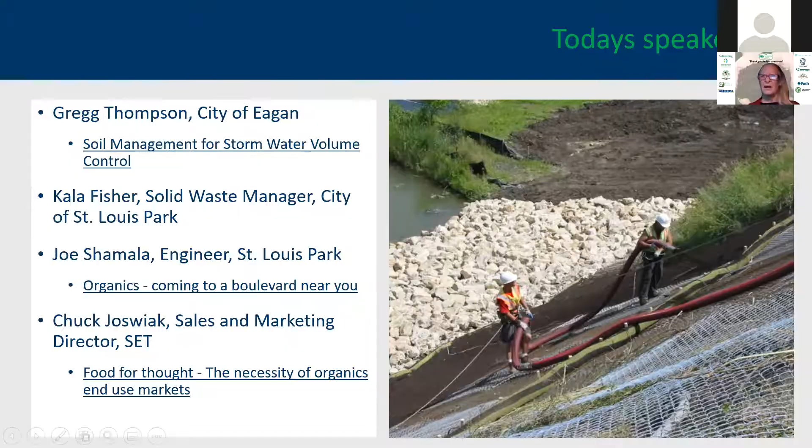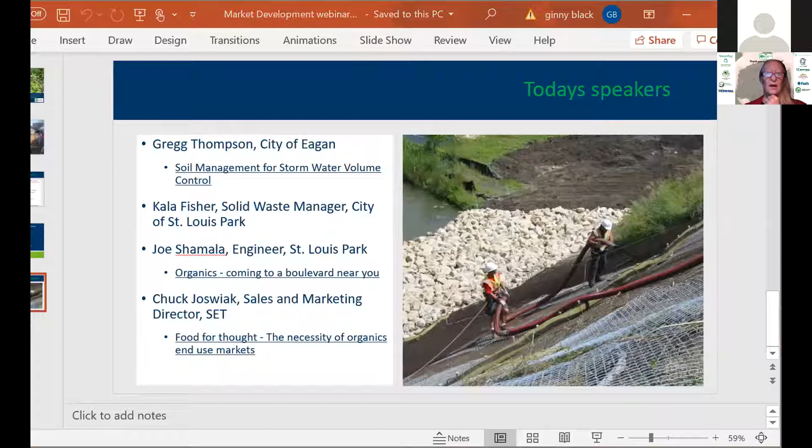So we're going to, let's see, stop sharing. And I'm going to bring up, let's see. I can, there we go. There's Greg.

The poll keeps getting in the way here. All righty, there we go. There we go.

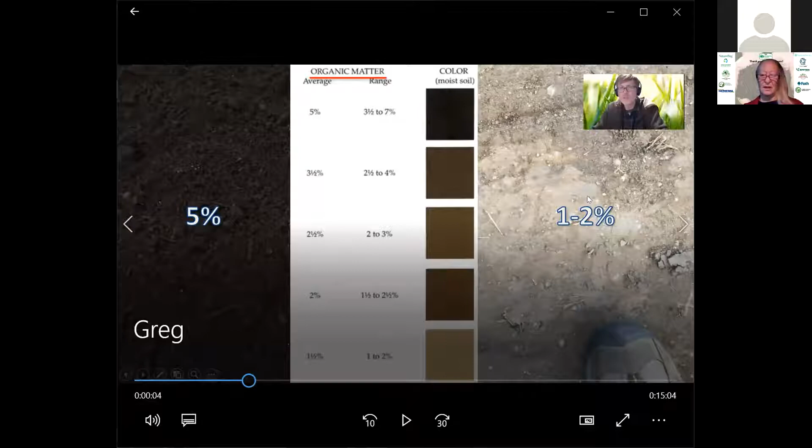Let's see here. Get out of the way. I have to, wait a second. Boy. Can you hear?

Hi, I'm going to talk about soil management for stormwater volume control. My name is Gregg Thompson. I work for the City of Eagan. I'm a watershed specialist at the city. Okay, so at the City of Eagan, I provide technical support to reduce stormwater runoff impacts on priority lakes through land projects. So if redevelopment projects, new development projects are triggering our post-construction stormwater rules or land disturbance rules, then I get involved on checking.

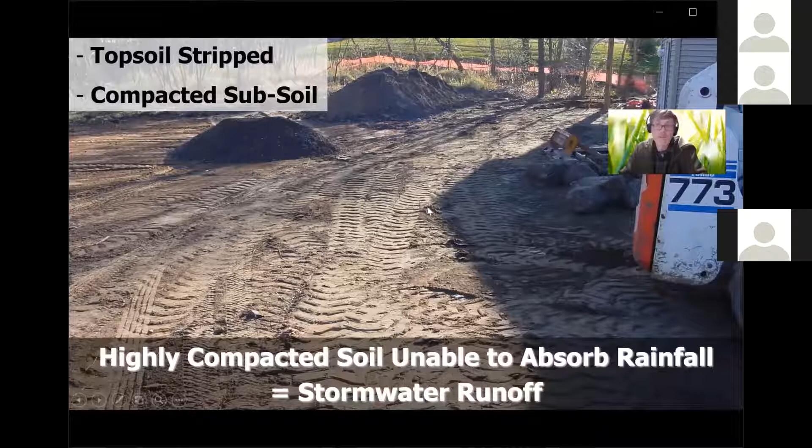So what often happens, these sites get revegetated on super compacted subsoils, mineral soils, sand, silts, clays that are just super compacted. Root growth can't push into that. It's too compacted. And then it gets vegetated, and then you get a rain event, and there's just a lot of runoff off of this. Water can't absorb into the ground anymore.

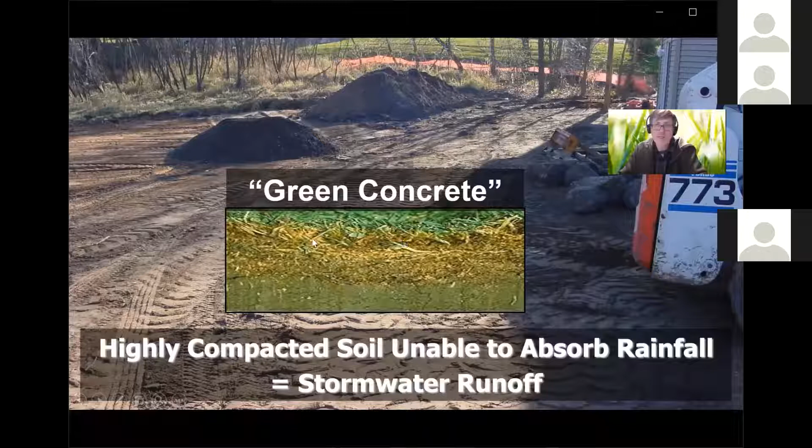So we call that green concrete when they drop sod on top of this, roll it out on super compacted subsoils. It absorbs a little bit of water into the sod itself and then saturates, like a quarter inch, and then everything else is running off in a rain event. So comparing natural soils to compacted soils.

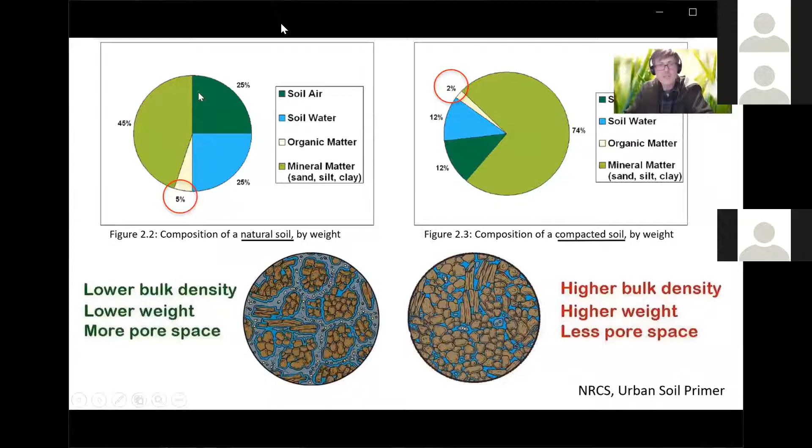It is typical on a natural soil for organic content to be 5 to 8%. You have less than 50% mineral soils, air pockets, moisture, water within there. So low bulk density, low weight, a lot of pore space within natural non-compacted soils, compared to compacted soils that just get scrunched down. Topsoil gets stripped off, so very low organic matter within that soil, high amounts of mineral soils, so sand, silts, clays. That results in higher bulk density, higher weights, less pore space.

On the left is a 5% organic matter soil; it would look like a black topsoil, compared to a 1 to 2% soil organic content, which we used to see more of on construction sites. This is what it looked like right before they rolled sod out on it or seeded it and put erosion control blanket or hydromulching over the top of it, but horrible growing conditions for plants.

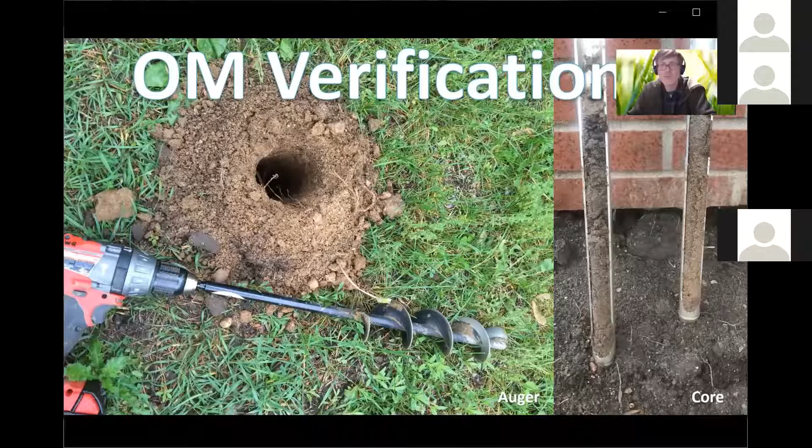Low organic matter, super compacted. Checking out soils, we use heavier duty soil augers or soil cores if you can physically get it into the soil. Sometimes we extract a 1-inch depth sample because the soils are just too hard. Send it to the lab, you get soil test results back. We're mainly looking at organic matter and pH.

Testing for soil compaction, we use a penetrometer as one device. That gives us readings in PSI. You're pushing it in at an equal pressure and then taking notes on where the gauge is on PSI. Below 200 is good growing conditions, so no restrictions on root growth. 200 to 300 PSI, fair growing conditions, it's sort of impaired root growth, and 300 PSI and above, poor growing conditions, really no chance of root growth into something that hard.

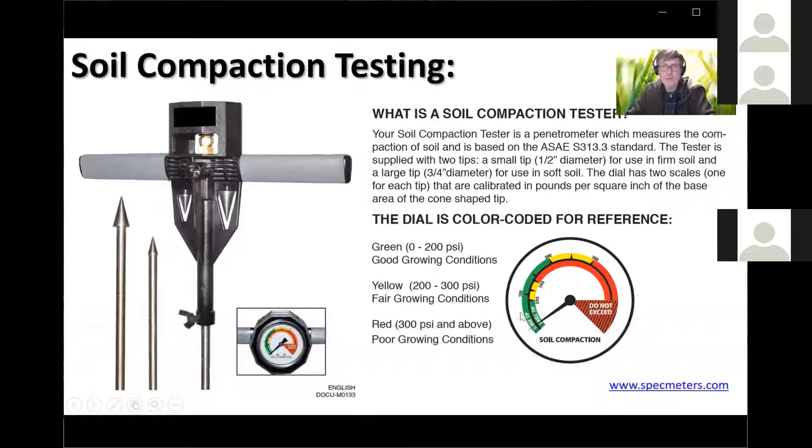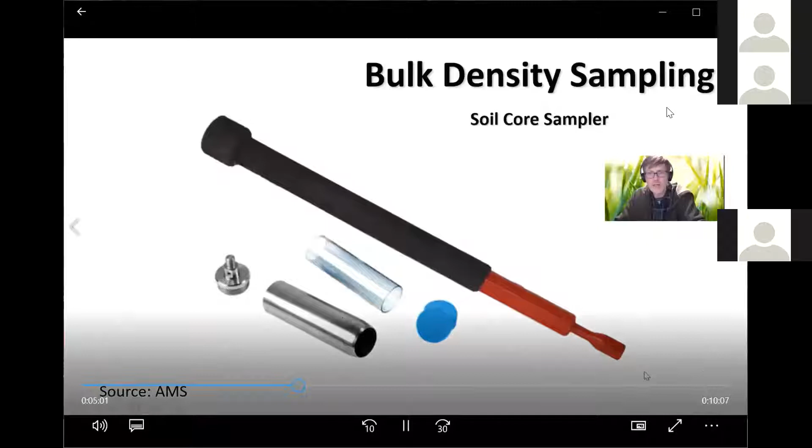Bulk density sampling, we use a soil core sampler. This is a slide hammer that goes on a bulk density sampler. We do this sometimes, but you collect the sample, a known volume, and then dry it out in a microwave and then weigh it to determine the bulk density.

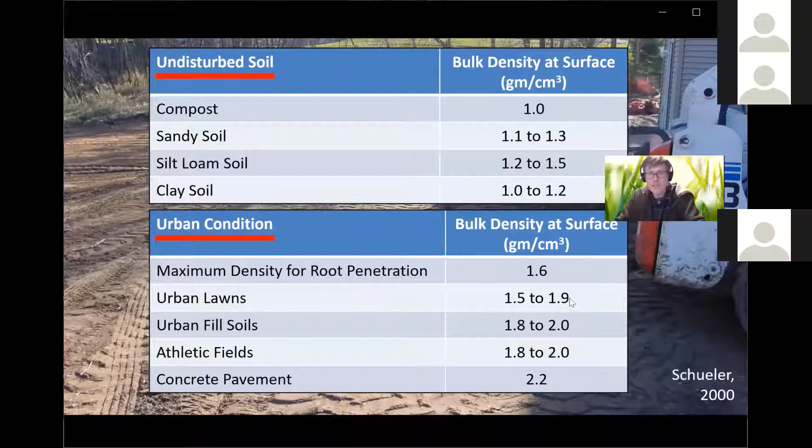For bulk density comparison, an undisturbed soil, so sandy soils, silt loam, clays, those are all right around 1 gram per cubic centimeter, compared to an urban condition. The maximum bulk density for root penetration is 1.6. Concrete pavement is 2.2. This was a table put together by Tom Schueler, who was at the Center for Watershed Protection at that time, doing a literature review of a lot of soil studies. What they're seeing is urban lawns, urban fill soils, athletic fields, all really close to 2, close to concrete on average.

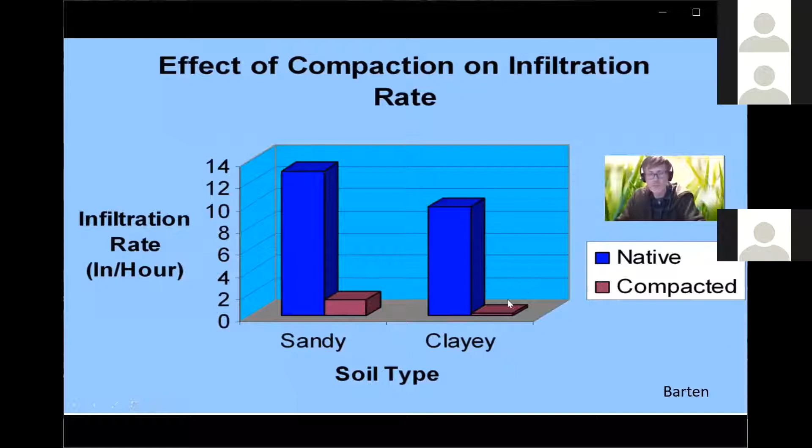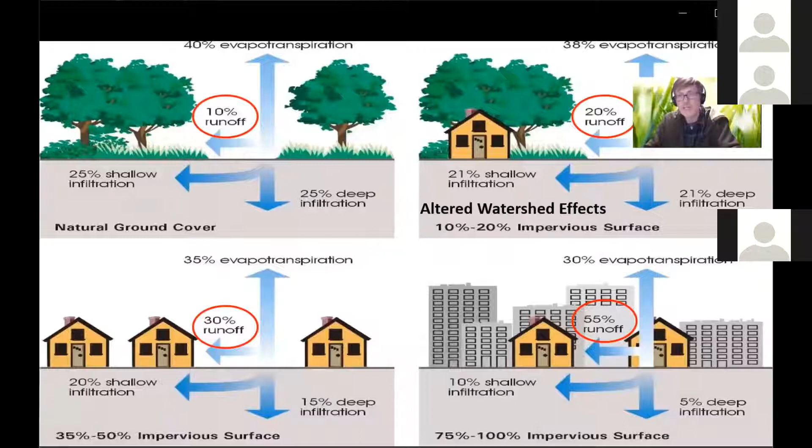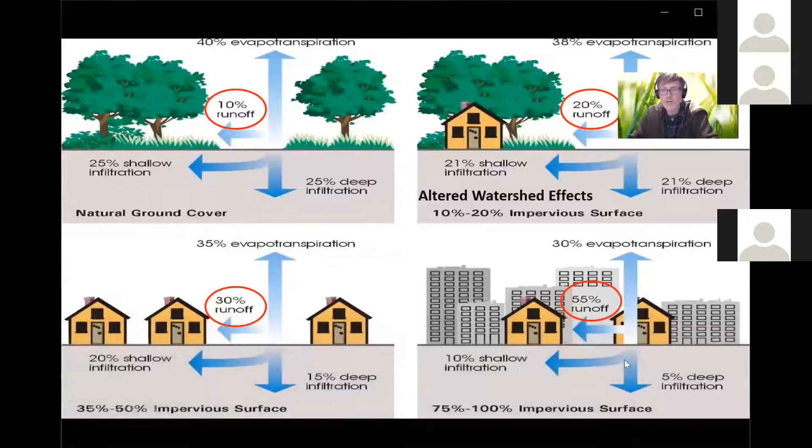So as we add impervious surfaces, rooftops, parking lots, driveways, streets, plus compacted subsoils underneath revegetated areas that have been graded and really highly compacted and disturbed, that's all effective impervious. The more impervious, the more runoff we have, the less water we have going into shallow groundwater and aquifers.

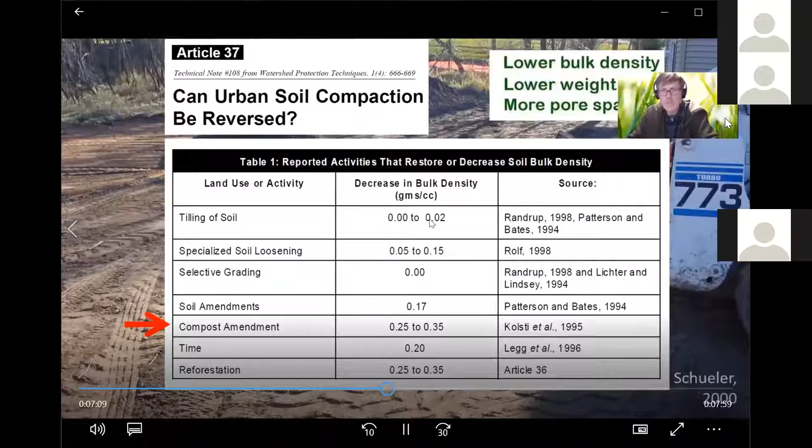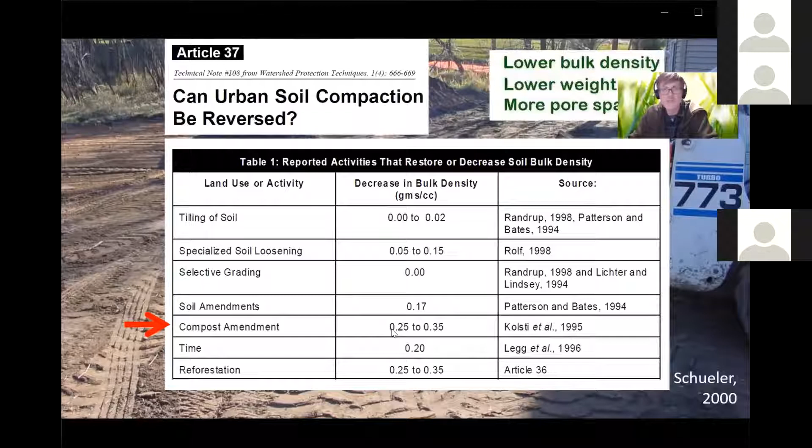Can urban soil compaction be reversed? This is also a literature review done by Tom Schueler of a lot of previous studies. Tilling of soil alone has really no chance of decreasing bulk density, because if you're not amending it with some organic matter to keep it open, it'll just seal back up. Compost amendment can be a significant way to reduce bulk density, because it creates this sponginess to the soil.

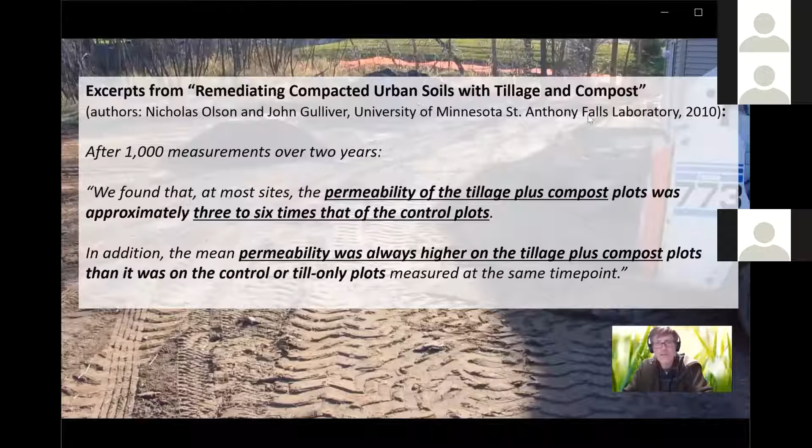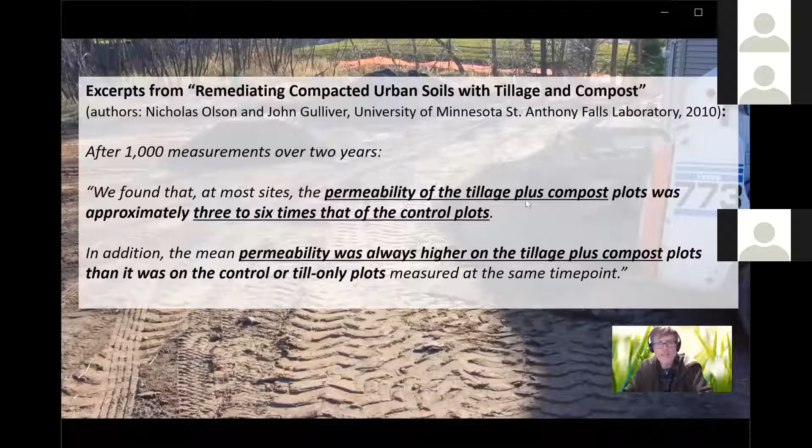There was a study done by Nicholas Olson and John Gulliver at the University of Minnesota St. Anthony Falls lab about 10 years ago on remediating compacted urban soils with tillage and compost. They worked on lawn areas within the Three Rivers Park District, took over 1,000 measurements over 2 years, with a control plot and a tillage and compost amendment plot. They found the permeability of the tillage plus compost plots was 3 to 6 times that of the control plots, and always higher than the control or till only plots.

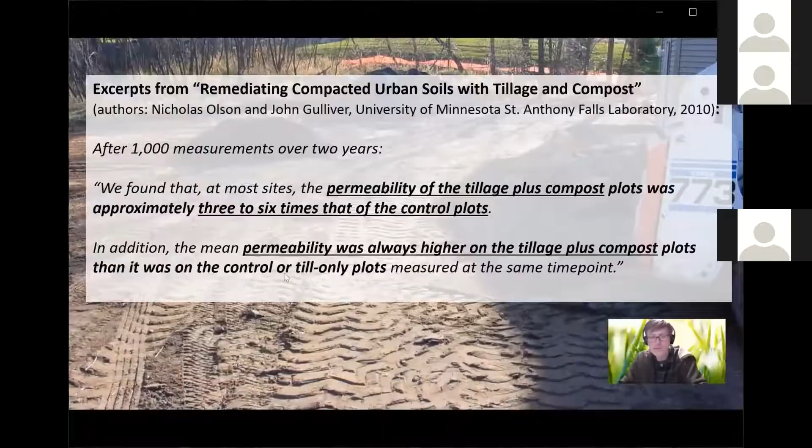For determining the compost volume needed, we have used a calculator, an Excel spreadsheet that came out of Washington State that was publicly available. We put in our knowns: bulk density, initial organic matter, our targets, bulk density of the compost being brought in, the soil organic content of the compost being brought in, the depth to be amended, and then it gives us the depth of compost to be applied.

We put in our area to be covered. It gives us the volume. You can put in a unit cost to get your total. But what we've sort of settled around is around 50 cubic yards per 10,000 square feet using MnDOT 3890 grade 2 compost. So that's with an assumption that the construction site is going to have 1.5% soil organic content that's just going to be occurring in that soil.

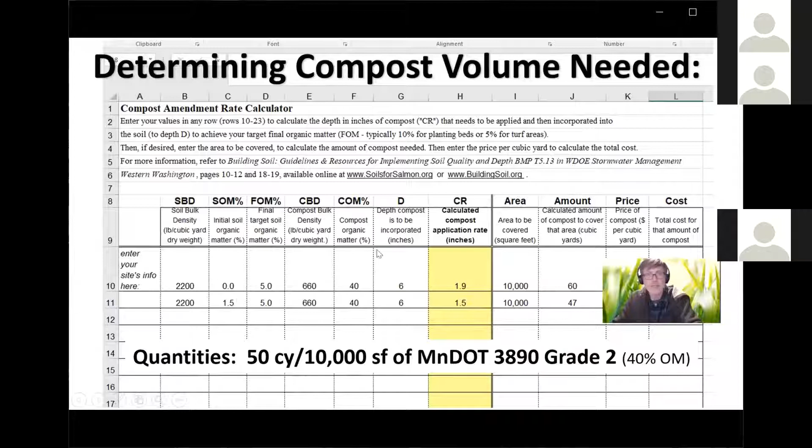So on Eagan sites, this is in our stormwater management rules that we put together in 2015 or revised. So sites with 10,000 square feet or more of land disturbance involving impervious surface installation, for their volume control options, they can choose to do nothing with the soils, but then those soils are counted as impervious surface due to soil compaction impacts when they're planning their volume control practices.

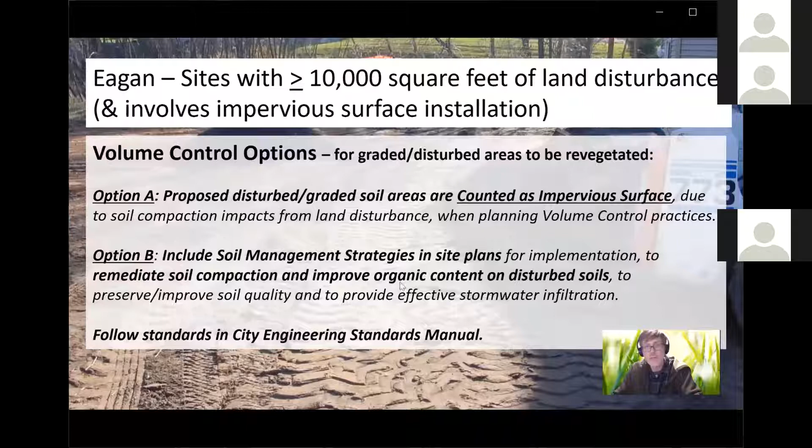And then they have an option of including soil management strategies to remediate soil compaction and improve organic content on disturbed soils. And if they do that, then those areas that are graded and disturbed to be revegetated don't count as impervious surfaces. And then they follow standards in our engineering standards manual.

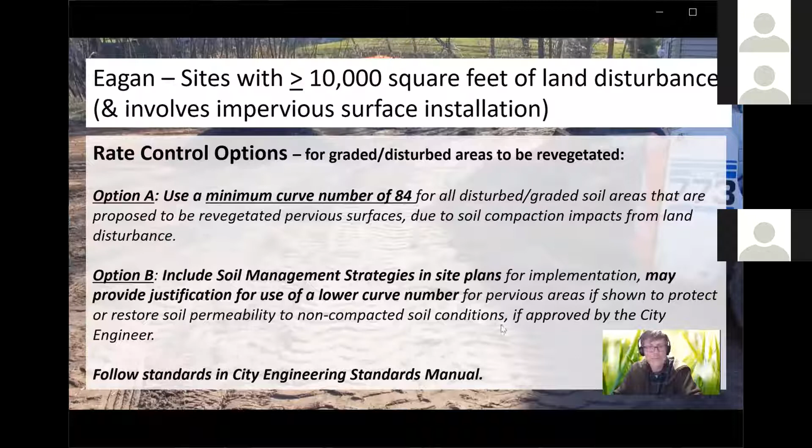For rate control, if they choose to do nothing with the soils, then they have to use a minimum curve number of 84 in their modeling for post-construction conditions. Or if they include soil management strategies, then they can justify using a lower curve number. Usually we'll go no lower than 64, roughly, for a curve number, and then follow the standards in the manual.

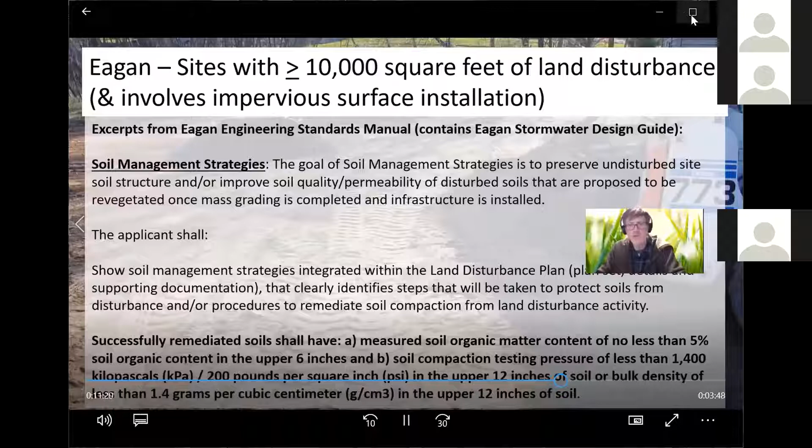So in our manual, we describe what the goal is of the soil management strategies to improve soil quality and permeability, what the applicant shall do, and then what our measurements are. So we want no less than 5% soil organic content in the top 6 inches, and then soil compaction testing numbers, where it should be at for bulk density, for using a penetrometer, or if they can take a 12-inch long wire flag, like a utility locate flag, and using one hand, push that into the soil to a 12-inch depth. If you do that, that's around 200 PSI, and so then we're good on that.

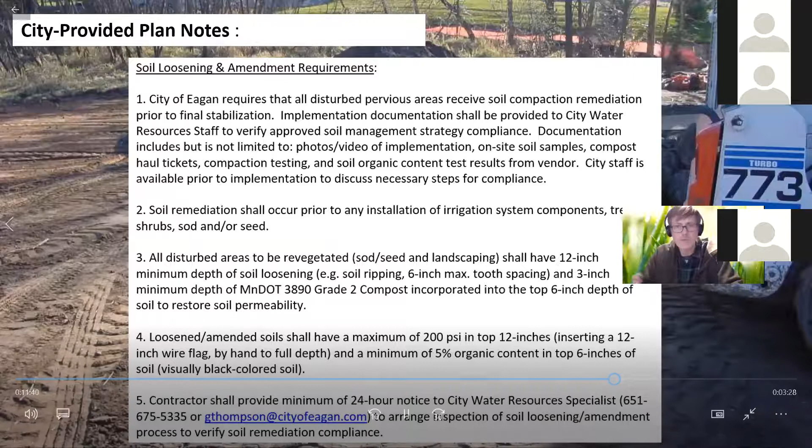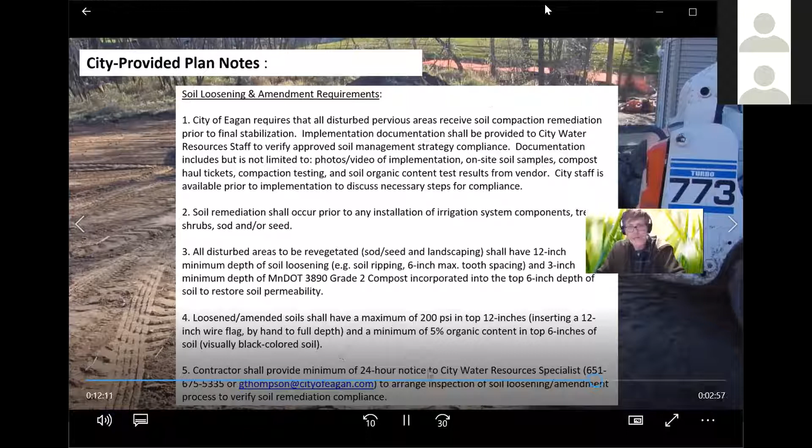And these are the notes that we provide to the private development engineers to put into their plan sets, into the grading plan, into the SWPPP, the phase 2 plan, and then into the landscape plan, because we want to make sure all contractors involved with anything outside on the construction sites are aware of this. So it includes what we are going to be asking for, that it's got to occur prior to the installation of any irrigation system, trees, shrubs, sod, or seed, what the requirements are: 12-inch depth of loosening, 3 inches of grade 2 compost, although we'll accept the 50 cubic yards per 10,000 square feet, how we're going to measure it, and that they need to provide us 24 hours notice to arrange inspections.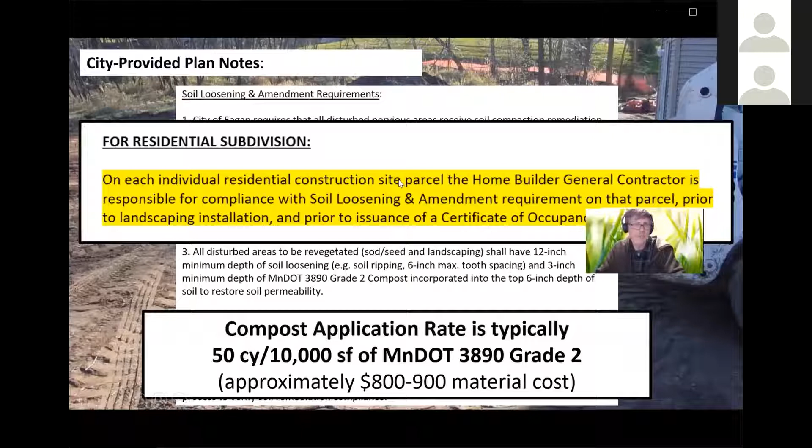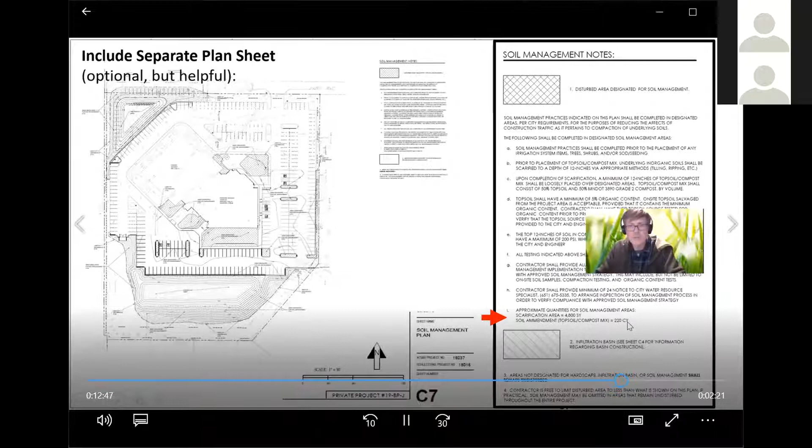For residential subdivisions, the developer is responsible for the overall common areas, and then as homes are built, if they're by different builders, those builders are responsible for their own lots before they're given a certificate of occupancy. What we're often seeing now is separate plan sheets for the soil management plan that show the areas to be amended. And we're requiring them to include the area to be amended and the volume of compost to be imported and incorporated.

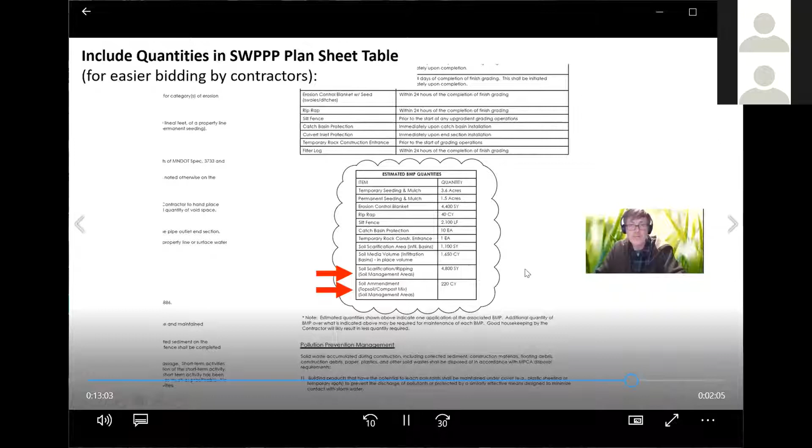We also require that to be included on the SWPPP sheets where they put their quantities for BMPs. So the grading contractors that are bidding on these know that quantity so they can be fair about the bidding, and nobody's surprised when we say, nope, we really do want you to implement those soil requirements, because oftentimes those are looked past.

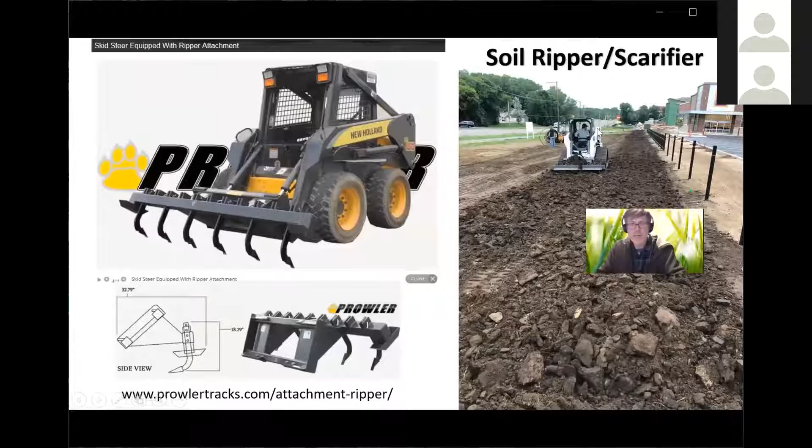So for the actual practice, soil ripper and scarifier, these are skid loader mounted rippers. Works very effectively, goes down to about 12 inches. You can adjust the teeth. They rip through first for the construction impacts, then add the compost, and then rip again to incorporate that. These are available from our local rental center.

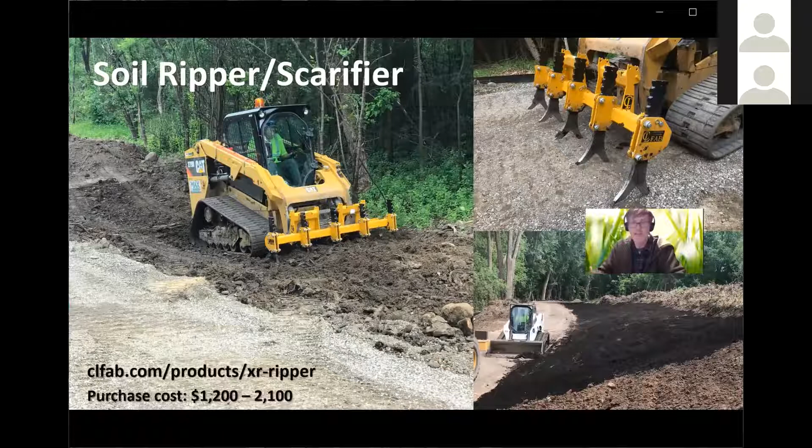There's also this heavier duty ripper that I really like. It's thick steel. These can go down to 18 inches in depth. So first they start off a little shallow. If it's really compacted, make a few passes, drop the teeth and go a little further, rip it open, and then put the compost on and rip that in. We say scraping doesn't count. We want it deeper.

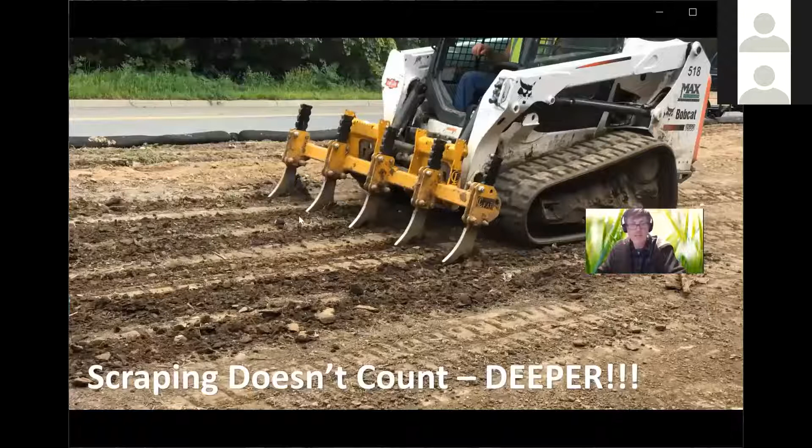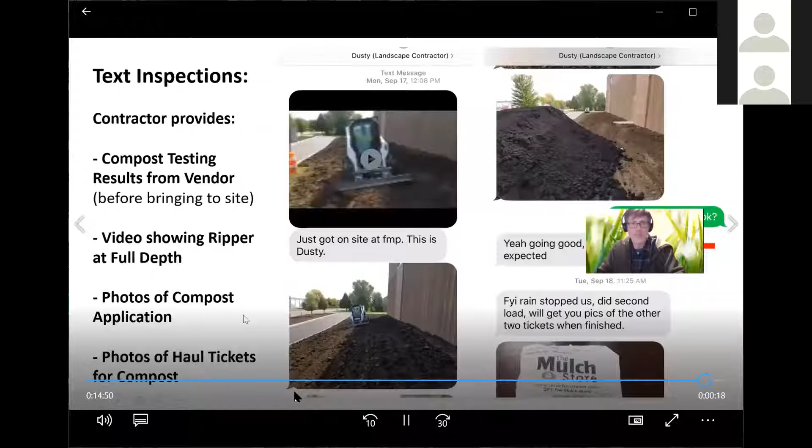There's good standards out there for sampling.

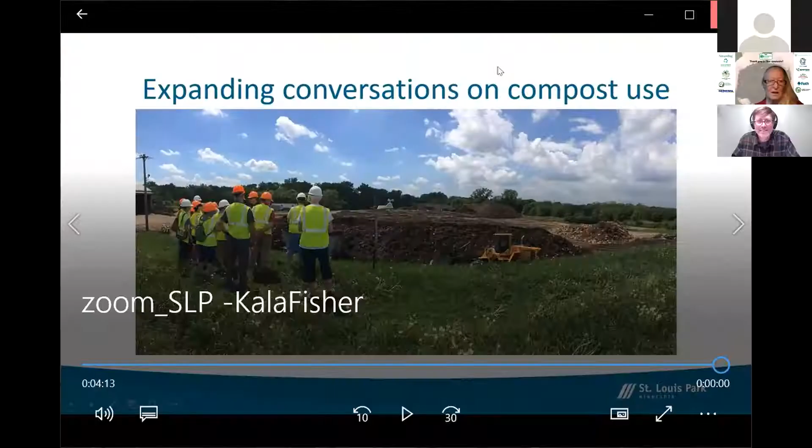A senior engineering project manager for the city of St. Louis Park. One of my responsibilities with the city is to maintain our specifications for road construction projects. In St. Louis Park, we take a thorough look at our specifications once per year and make changes for improvement. Here's a little background to help you understand the type of topsoil which has been used in St. Louis Park. Up until 2016, St. Louis Park used the loam topsoil as defined in MnDOT specifications.

So why did we change? We were having issues keeping the sod alive on our road construction projects, and we were having to replace a lot of dead sod. One of the items we noticed when we took a closer look at the specification was that loam topsoil does not require the use of any compost. One of the questions we had was, is the organic content of the soil we were using too low?

In 2017, we took a closer look at the MnDOT specifications and decided we were going to try a different topsoil called Boulevard topsoil. Boulevard topsoil consists of 1/3 loam topsoil, 1/3 sand, and 1/3 grade 2 compost. This can be source separated organic material food scrap compost or compost made from leaves and grass clippings. One thing we noticed with the Boulevard topsoil is the high sand content. Some residents complained that the topsoil we were installing was too sandy, and they were concerned that it would not support the newly installed sod.

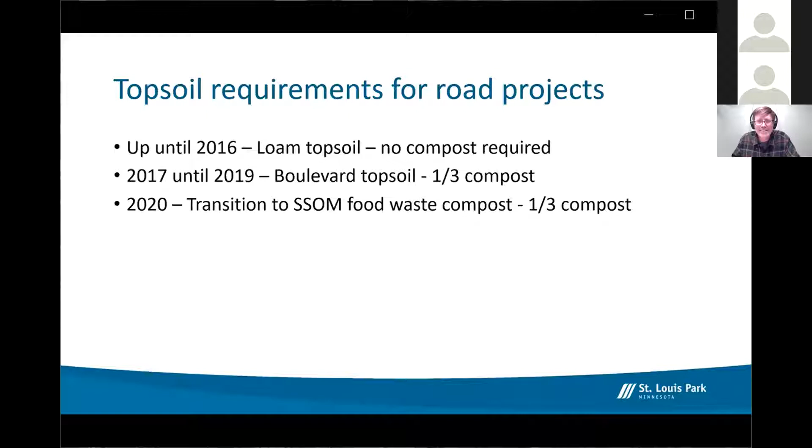So how did we make the transition to SSOM food scraps for the compost in our topsoil? Kala and I met about a year ago to discuss the use of SSOM on our road construction projects. We were both interested in finding a way to be able to use the compost, which was created by food scraps of our residents, and turn it into a product that we needed on our road projects. After initial discussions and reflection, it was time to modify our specification to use SSOM compost in our topsoil.

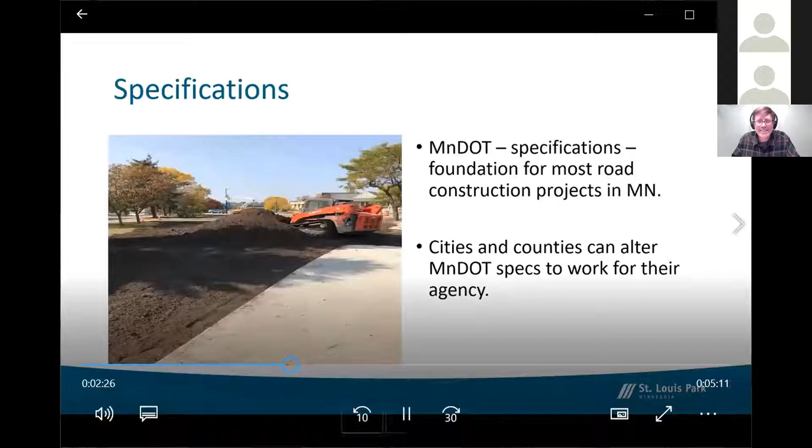So how do we inform the contractor who is bidding on our projects the requirements of our city? It is through the specifications. A little background information on how many cities and counties put together their specifications. MnDOT put out specifications which can be used by anyone doing road work in the state of Minnesota. As part of the contract documents, engineers put together plans and specifications so that the contractor understands exactly what they are going to provide for each item that they will be paid for. Cities and counties usually use MnDOT as a guide and supplement the MnDOT spec or modify them as they feel necessary to get their desired outcome.

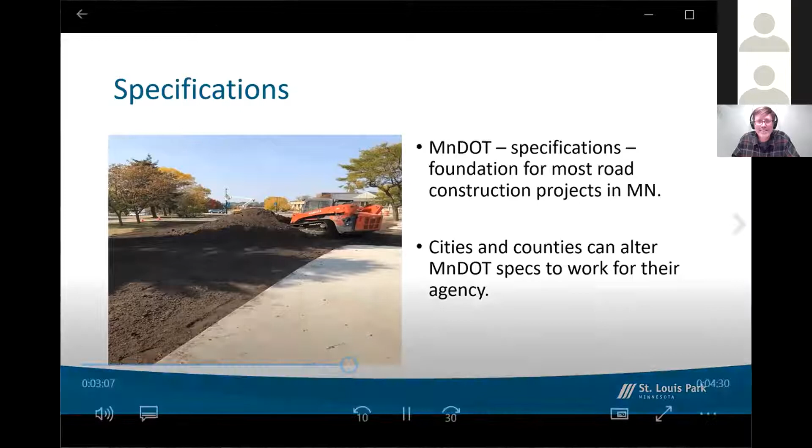MnDOT defines grade 2 compost as derived from the decomposition of leaves, yard waste, SSOM, or a blend. If an agency is interested in ensuring that a contractor uses SSOM from organics, their specification must be updated to specify the requirement, as the contractor could meet the grade 2 compost specification without the use of food scraps. The city wanted to ensure that the compost which was being generated by our residents was being used to create topsoil for our road projects. The current MnDOT specification allows the use of food scraps in the compost, but does not require it.

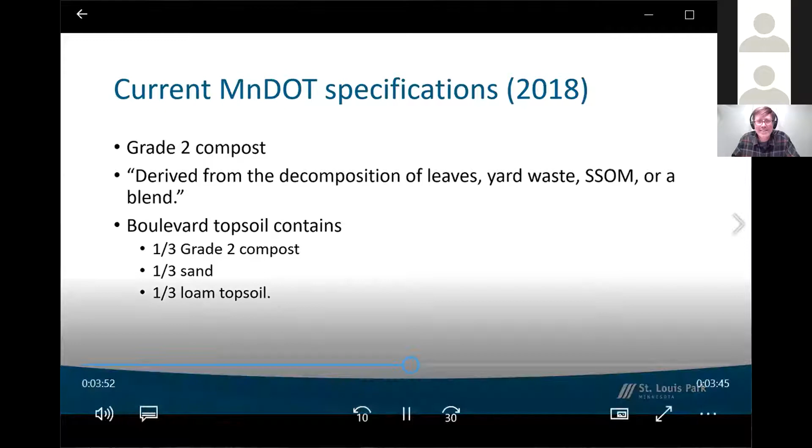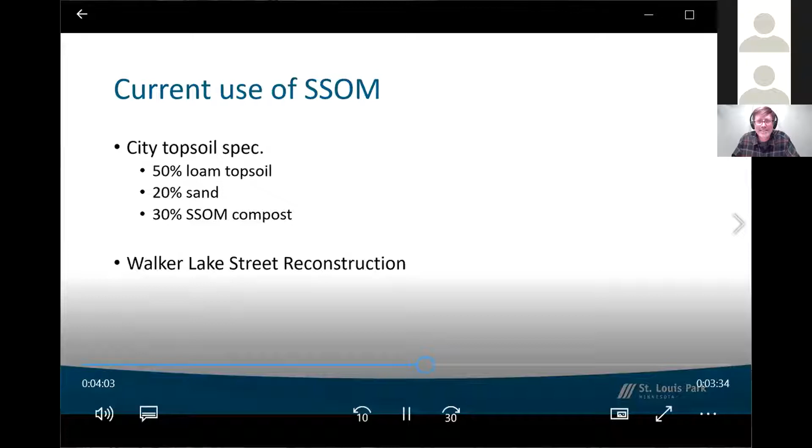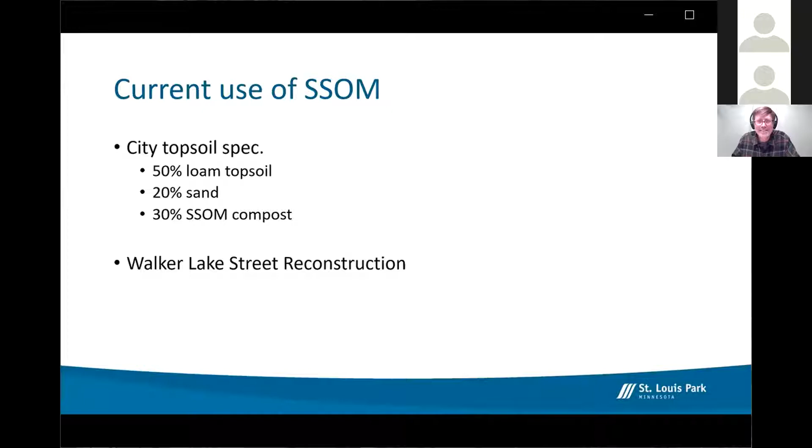In St. Louis Park, our main use for SSOM compost is to create topsoil, which is then used on our road projects. Currently, we use 30% SSOM compost in our topsoil blend. A question which you may be thinking about is, has the city used the new topsoil spec on a project, and how is it working? The first project which used the new topsoil spec was the Walker Lake Reconstruction Project, which was finished in October of 2020. The preliminary results are showing signs of success. The contractor let us know that it was easy to work with for installation. We will be taking a closer look at this in the spring to see if the sod is looking good. We will also determine if we need to make any adjustments to the blend.

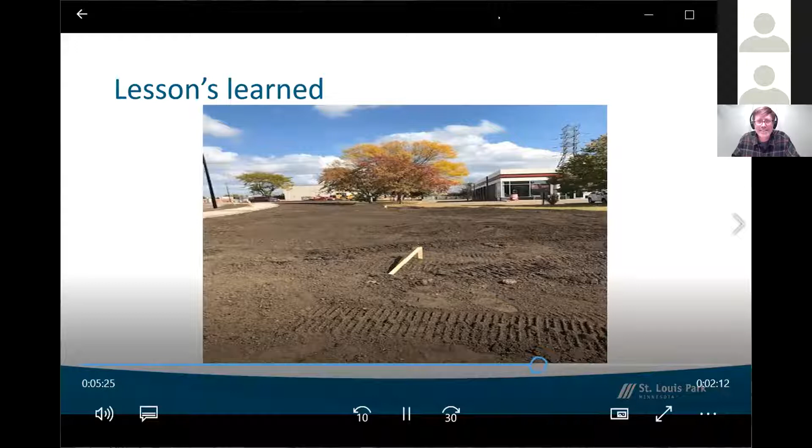So what have we learned so far about the use of SSOM in our topsoil? We've learned that the specs need to be clearly written so that contractors provide exactly what you are looking for. As an example, we bid out 2 projects with our modified specification in 2020. Our goal was for the contractor to use the SSOM from food scraps. Due to the definition of SSOM and the 2018 MnDOT specification, we were unable to hold the contractor to providing compost which was generated by food scraps. One of the projects in 2020 brought in compost from Specialized Environmental Technologies, or SET. The other project brought in compost which was made using only yard waste and grass clippings. Both projects met the specification.

How do we prevent this from happening again? We needed to update our spec. The city clarified the source of the organic material which can be used for compost. Contractors now have two choices, SET or Shakopee Mdewakanton Sioux Community. Clarifying this in the specifications makes it clear that the contractor must provide the SSOM food scraps compost to create topsoil for our road projects.

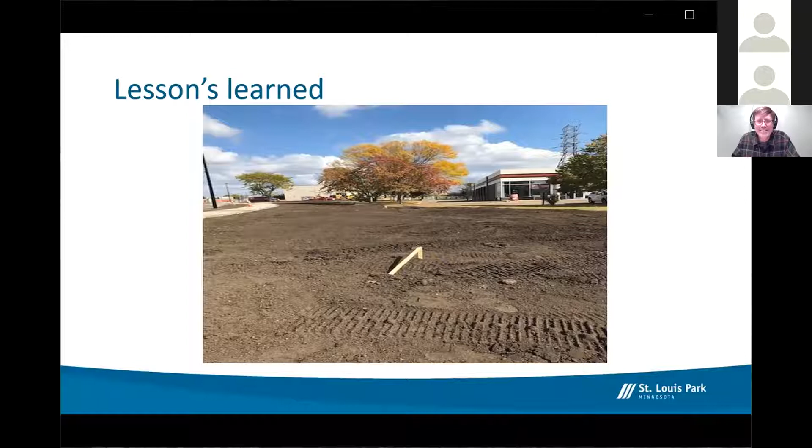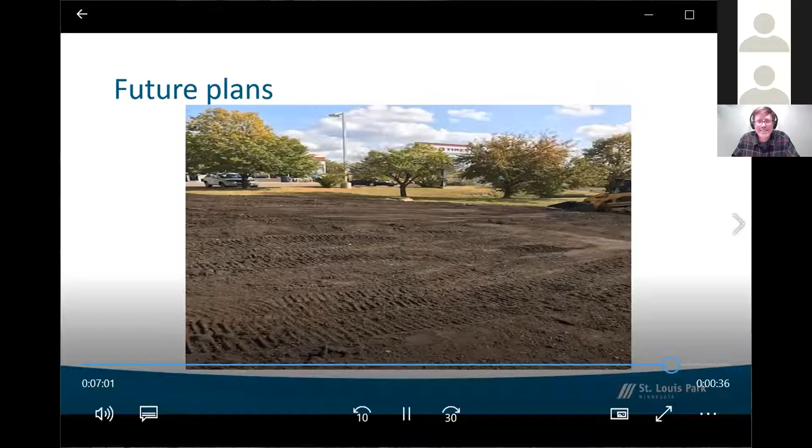What are the future plans for the city? First, we need to see the results in the spring. This was the first year we used this type of blend for topsoil. So far, the SSOM blended topsoil is working well. In 2021, all of our construction projects will be using SSOM from food scraps to create topsoil. This will more than double the amount of compost we used on our projects this year. Another item we will be looking into is the amount of compost which can be used within the topsoil blend. We are hopeful that we can modify our current blend to include more SSOM compost. Instead of using 30% in our blend, maybe we can use 40%. Maybe we can use more. We will continue to do adjustments until we find the blend which works best for our city.

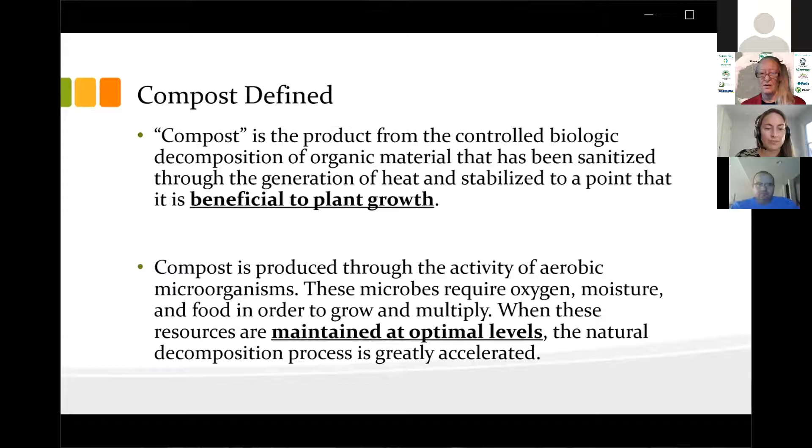After being in the horticultural and erosion control industries for well over 20 years prior to this, dying plants and insufficient seeding outcomes were always one of the most frustrating issues for those trying to wrap up the project and close it out to get the retainage. So what did they do when something failed or died before closeout? Most of the time they blamed it on the soil. I changed to a believer in the importance of healthy soil when I saw results and put money in my pocket. So ask yourself, how and why would someone want to differentiate composts?

I mean, different feedstocks or ratios of those feedstocks all give the same end result, right? Compost uses and finished properties must all be the same, correct? The process to make it, they're all the same, aren't they? How it should or shouldn't be regulated, they all must not be too different in the eyes of the regulator, manufacturer, end user, right? Absolutely wrong.

Feedstocks will have different properties, C:N ratios, water content, surface area, and will need to be adjusted accordingly for optimal composting levels. Just like soil is different in how it performs based on the levels of sand, silt, clay, and organic matter, the finished compost will have different maturity, nutrients, organic carbon levels, and particle size affecting how it will perform. These need to be taken into consideration when designing a spec because they can change the results you are trying to achieve and the costs of the finished material.

The final finished product will have different properties based on those feedstocks, like we said in the last slide, as well as how to screen for particle size. What may be fine for tilling into a roadside application probably isn't the same for someone growing vegetables or bagging the product for retail, or someone top dressing an athletic field instead of trying to control erosion on a one-to-one slope. How it's processed will play a part in its end-use market.

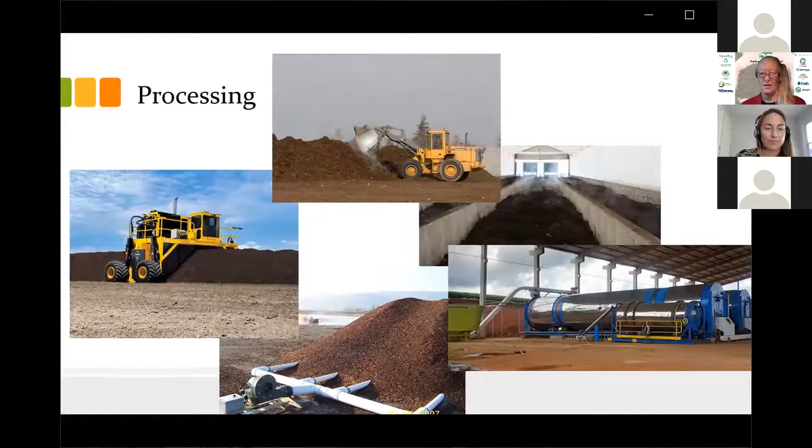Then, is the maker of the compost someone who just piled up a bunch of leaves or brush on the back 40? Or are they permitted to manage that material, keeping safety of its employees and the surrounding community in mind? Do they manage for fire prevention or erosion control and stormwater runoff? Are they being held to an even higher standard of contact water management to protect the environment from possible pollutants? It all makes a difference in the end markets.

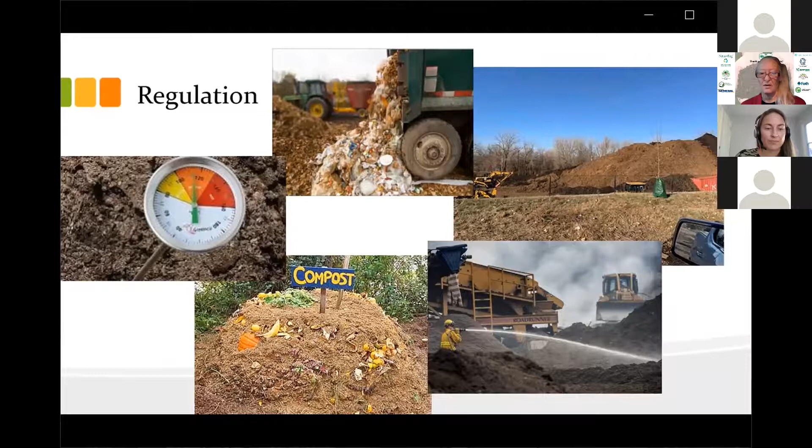So just because it's black in color doesn't mean it's compost. Not all compost is created equal. So set your goals and define the purpose compost plays in reaching those targets. This is a big one. Are you targeting pollutants, capturing food, maybe trying to prevent erosion? How about sequestering carbon or growing a healthy plant, trying to feed the world? Design your specs to accomplish the task in the most economical way.

The MPCA and state have set a goal to divert 75% of the waste stream here in Minnesota. So diverting food along with as many compostable items as possible is key to their success. Unfortunately, with that comes a significant opportunity for trash that is not compostable to enter the compost site. To make the system work, they must give value to the end product they try to divert by developing a spec and a market for a product that will have some sort of contamination, or they must choose to eliminate the contamination first before it gets to the composter.

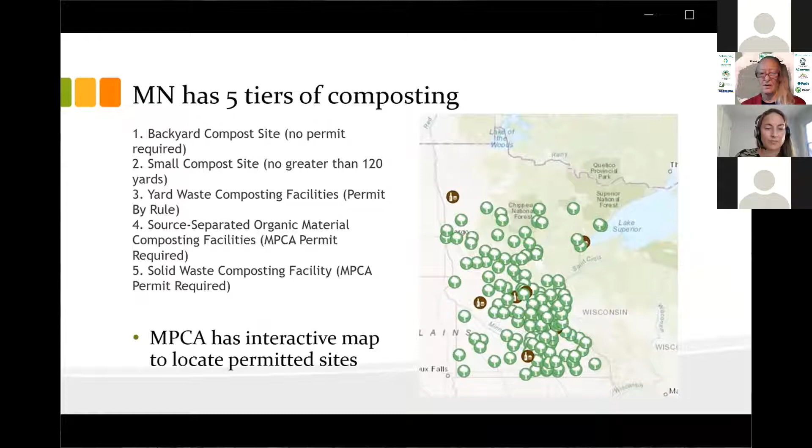Pricing a compost is also difficult due to the lack of knowledge about the product, the many different feedstocks, and the perception that the material should be free. Unfortunately, some public operations choose to just give away the product after it sits a while, and some contractors do the same. They just get rid of it when it looks black.

I made the mistake of trying to add value to compost across the board from our yard waste sites to help save our food waste facility that was struggling moving end product due to some contamination. In doing so, I took a product that was better and cheaper to make, yard waste, and showed the benefits of it, causing a spike in our sales, creating a demand for it and increasing the price of it. It also opened doors for a lesser desirable product that cost more to produce once I ran out of the good stuff closer to the projects that were happening. Unfortunately, my own subsidizing of a system is now failing due to the sudden surge in those making the easier yard waste material or processing covertly and causing prices to reflect this.

While some folks are content to pay $35 and up on decomposed plant matter like peat from a peat bog, they're crying at having to pay $8 for compost that could have just gone to a landfill that's virtually the same. So what is the true value of compost?

Like I stated earlier about becoming a believer, when I added up the lost revenue due to buying replacement nursery stock and then the labor to replace it, including the cost to haul out the dead material, I would have been able to pay almost $50 to $60 a cubic yard for the amount I needed if I looked at it from a different angle, and I still would have come out ahead. Even paying more if I accounted for the lost revenue of a crew that was busy doing replacements or fixing seeding and sodding when they could have been installing new work.

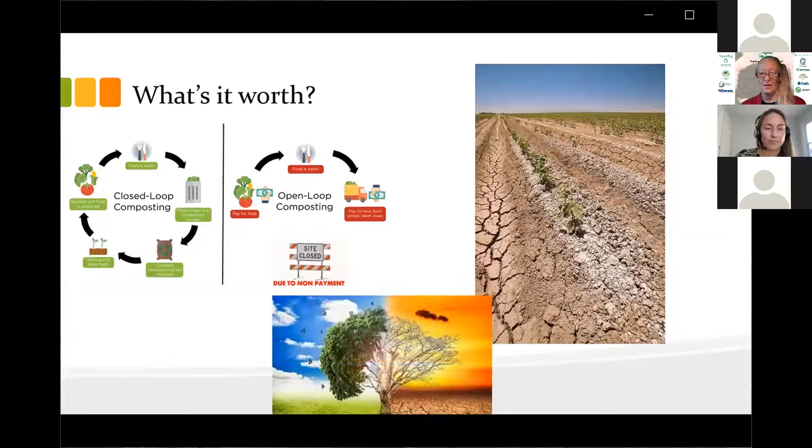How much is carbon sequestration worth to reduce global warming, or sustainable regenerative farming systems instead of killing our soils and wasting water? I know farmers who have said it's worth as much as $24 to $30 a cubic yard in their fields due to the savings in watering, fertilizer, and increased crop yields at times when fertilizer was more expensive. Unfortunately, it's more difficult to work with the volumes they need, and they don't always want contamination or possible weeds getting in their fields. Most of them tell me it's because they bought cheap stuff from someone not properly composting.

I also have a previous customer who fails to understand that the $2 savings per yard from a guy who is screening out wood fines and calling them compost is the reason he has almost been doubling his fertilizer costs the last few years. But hey, he's saving $400 on 200 yards of compost he buys every year, right?

Further understanding of the different types of compost you have at your fingertips will help with the best uses for that material. If it has a few pieces of glass or plastic from your food collection program, it may not be the best to top dress a soccer field with it, or put it in a bag to sell at a home improvement store, or sell it to a potato farmer down the road. A roadside application, mine reclamation, or fixing the subsoils of a construction project might just be a better fit.

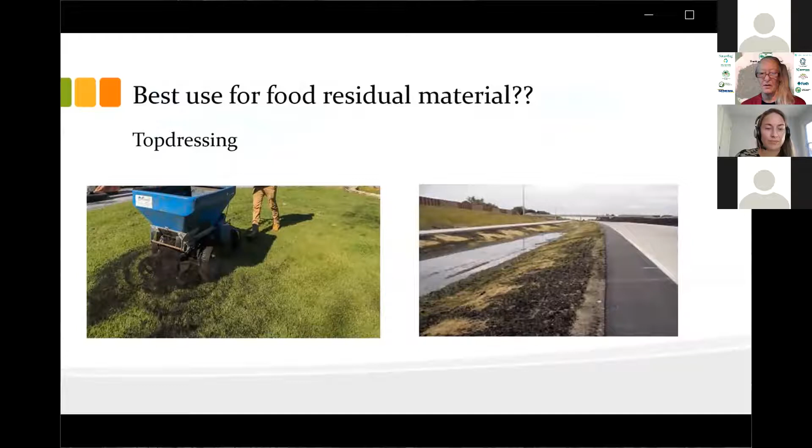A more coarse material mixed with smaller fines could be ideal for a steep slope that you need to protect from a heavy rain event and get vegetation to grow quickly, while a real fine material can pull out and trap 95% of the contaminants from oil or heavy metals from roadside runoff.

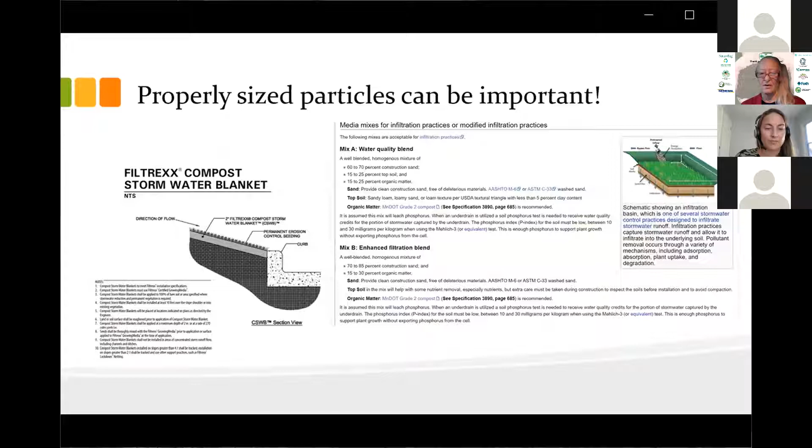In Minnesota, there are specifications out there for a handful of different uses, but many of them point to just one of 3 fairly generic options for compost use. These may not be ideal for all applications and may not take into account the other goals you may be looking to achieve. It is really up to us to understand the best use of a material based on its characteristics, or to define specific materials for certain applications.

The challenges with specifying the end use of a compost product will be difficult to overcome without some changes in how we look at compost. If the market dictates the ultimate decision on using compost is based on the cheapest price rather than performance, or maybe the ambitions of another program it supports, the industry is doomed from the start. People will continue to ask why we are doing something that isn't helping or working when it wasn't properly composted and put in the right situation to begin with.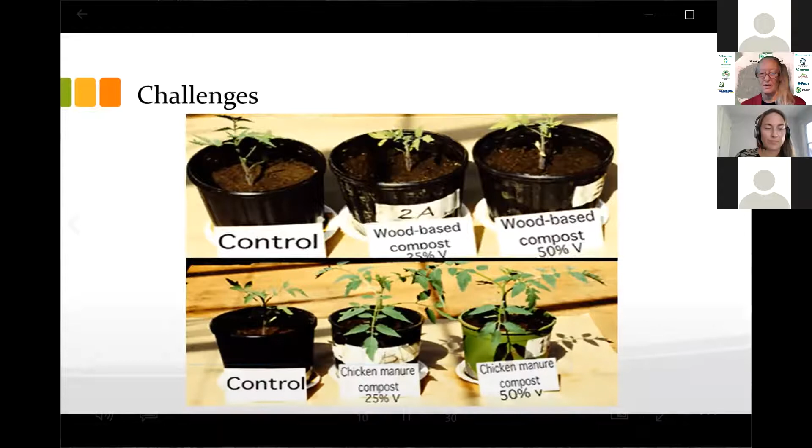Instead of lions and tigers and bears, oh my, which I understand can be more of a concern at some compost facilities than others, not necessarily ours, COVID and PFAS and microplastics, oh no, we hear about them every day. These are the challenges to the systems we have in place right now.

Pathogens can be in the composting process. However, if done properly, they can be managed and eliminated under the right composting conditions, keeping employees and end users safe. Most, we even have effective treatments for. Some we have little knowledge about and can cause concerns about our operations, like COVID, which still today poses challenges across the country with waste streams. As an end user, you should be confident that you're not sending out something that could make someone sick.

PFAS and other persistent compounds are ubiquitous in the environment and are still used or replaced with shorter chain versions we don't know much about. Many are allowed. However, the costs must be absorbed by the landfills or the composter dealing with them today because they pose an environmental threat. How could an SSO composter ever compete with other systems unregulated out there with these costs that they incur?

For these reasons, many composters discourage the collection of compostable products, not because they contain PFAS or PFOS, but because they mask the garbage containing those chemicals that often accompanies the good compostable materials.

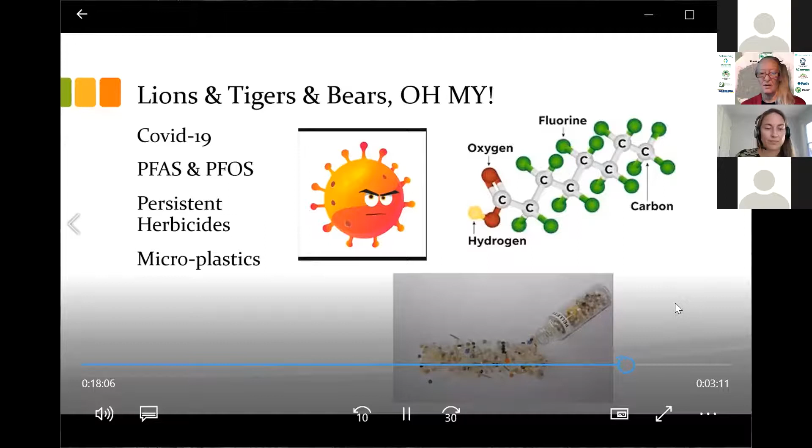Like I said before, many of the composters want to improve the environment, so we try to take the necessary precautions to do it right. That typically starts with the first step of becoming a permitted facility. Then there are EAB, noxious weeds, jumping worms, and other invasive pests that add additional challenges to compost facilities. We have it all. When specifying compost, know that it came from a facility that goes through the proper processes to deal with these, and that should help you sleep better at night.

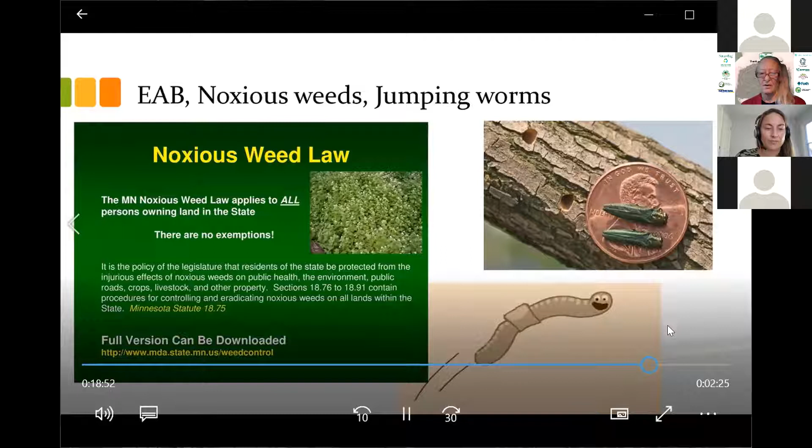I also look at things like jumping worms that are found on the surface of the soil and fairly shallow in the soil, then wonder why we don't regulate the millions of yards of soil moving around the state for construction projects. I'm confident it won't live very long in our compost piles if raked up with the leaves, but a soil pile, I'm not so sure. But even noxious weeds can be a concern at a yard waste site, or possibly the land clearing companies hauling out truckloads of unground wood waste to sites with emerald ash borer in them.

To sum this up, start with gaining knowledge about compost. Who's making it in your area? What feedstocks are being used? Do they test? The STA gives a ton of data points to look at when determining if it's a good material. Are they a reputable facility following certain guidelines by your state?

Are you making sure they are protecting the environment and making a material that is beneficial to your project in the end? Next, determine your goals for using it and ask yourself if you can write a spec based on the products you have to accomplish that goal. Is this the best use for the product you have on hand, or can you go back to the composter to adjust some of the things they're doing to give you a product you may need?

Look for other state specs or check out companies like Filtrexx or the USCC and its chapters who have put together these specs and guidelines for the materials. Check to see if the budget will allow for it to be incorporated in your projects. And if not, do you need to do some of the other things now because you're using compost, or could those things be eliminated possibly?

Work diligently to make sure the challenges composters are trying to overcome are addressed. Remember, this isn't some multi-billion-dollar company with the resources to handle all of these things that have no control over that. One employee dealing with the time and efforts to properly site and manage a facility along with following the rules to protect the environment is enough to add a few dollars to your cost per yard of compost material made in the end. So be sure it's a level playing field that you're working with.